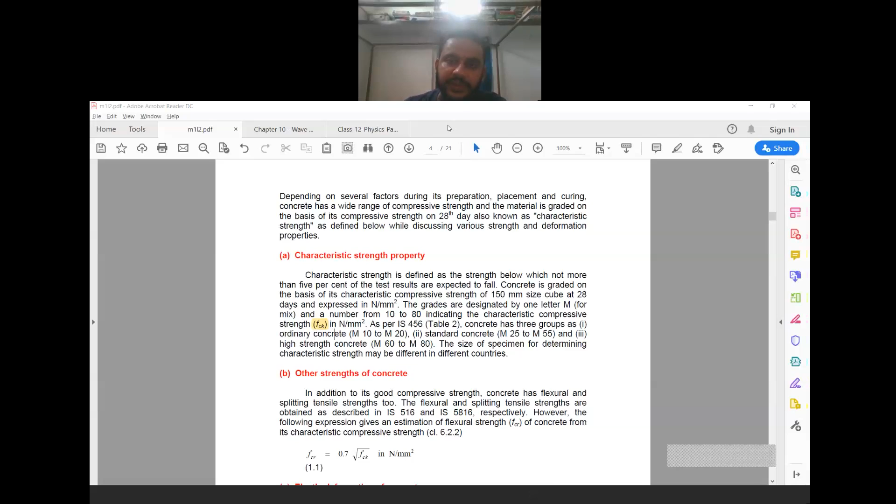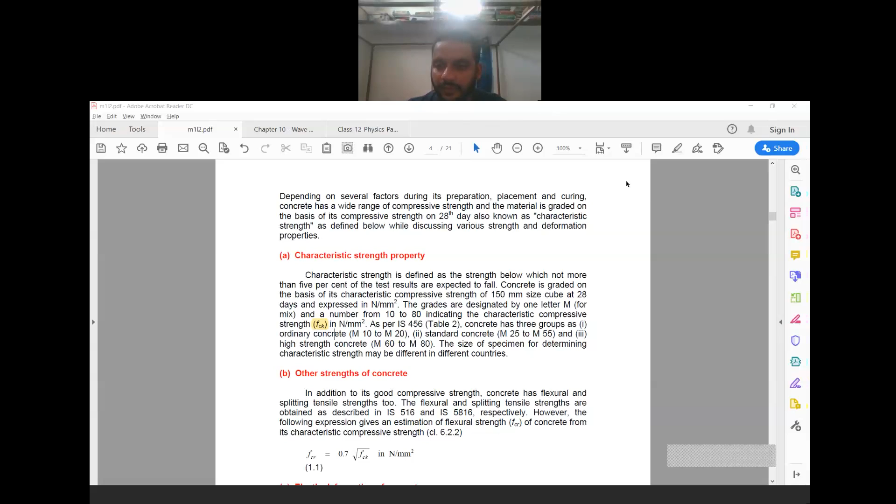Okay, so next, see this other strength of concrete. Now do you have IS 456 2000 with you, all of you? Do you have IS 456 with you? In the last class I told you so many times.

Yes sir. Okay, so now go to clause number 6.2.2, the clause number written in the PDF. Go to clause number 6.2.2. So if you go to that clause, you can see there is a formula given.

Tensile strength of concrete, can you see it in the book, in the PDF? Can you see the formula? I think it will be on page number 16. FCR means it is the tensile strength of concrete. So tensile strength of concrete equals 0.7 into square root of FCK, Newton per millimeter square. With this formula we can find out the tensile strength of concrete.

So now, say in the exam you have a question that for M20 grade of concrete, what will be the value of tensile strength? Can you find out the value, all of you? Can you find out the value? Try to find out and tell me the answer.

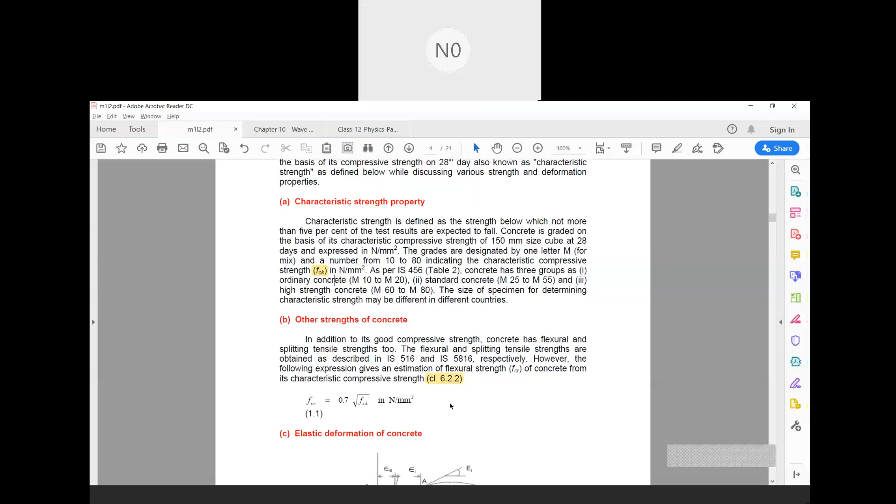3.13, 3.13. What will be the unit? Newton per millimeter square. Newton per meter square or millimeter? Millimeter square, yes, Newton per millimeter square, not meter square. Newton per meter square will be your Pascal. If you write Newton per meter square, then it will indicate Pascal, and in that case it will be wrong.

So how did you find out the answer? Can you tell me how did you find out the answer?

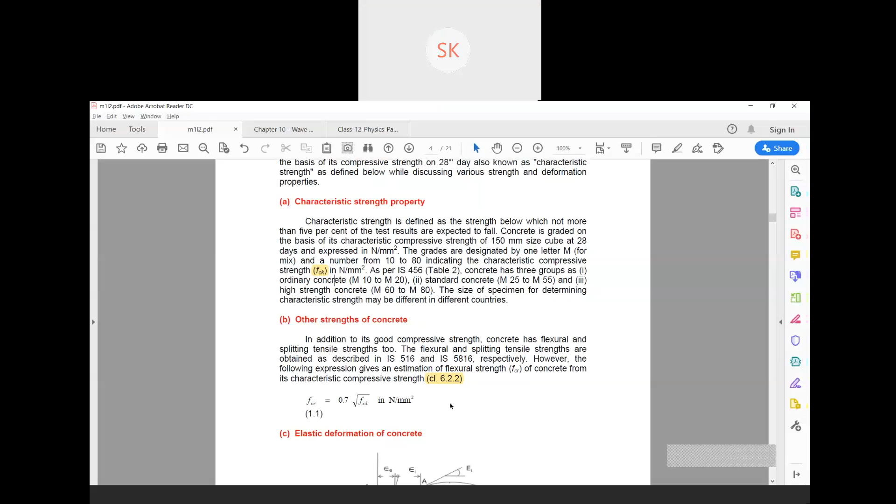Since it is M20, the compressive strength will be 20, so the FCK value will be taken as 20. Just put the value of FCK as 20, and you will get the answer.

Similarly, for M30 grade of concrete, you just have to put the value of FCK as 30, then you will get the answer. So from the characteristic compressive strength, you can find out the tensile strength of concrete also. Let us see the other one.

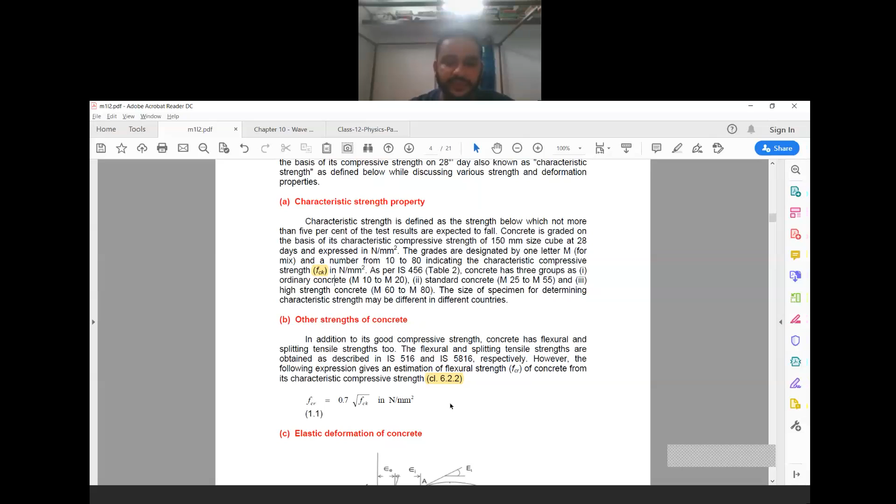Next, elastic deformation of concrete. Go to the formula: EC equal to... I hope you can see the formula. EC equal to 1.2, 5000 square root of FCK.

EC means modulus of elasticity of concrete. The suffix C indicates C for concrete and E for Young's modulus or modulus of elasticity. Similarly, we can find out the modulus of elasticity for concrete from the value of characteristic compressive strength.

You can see the chat box, I will write down the clause number: clause 6.2.3.1, in the same page, page number 16. Go to clause number 6.2.3.1.

The modulus of elasticity of concrete can be written as given by the formula in the IS code also. I hope all of you can see it. Can you see the formula in that IS code? Yes sir. So from this formula also you can find out the elastic modulus of elasticity for concrete.

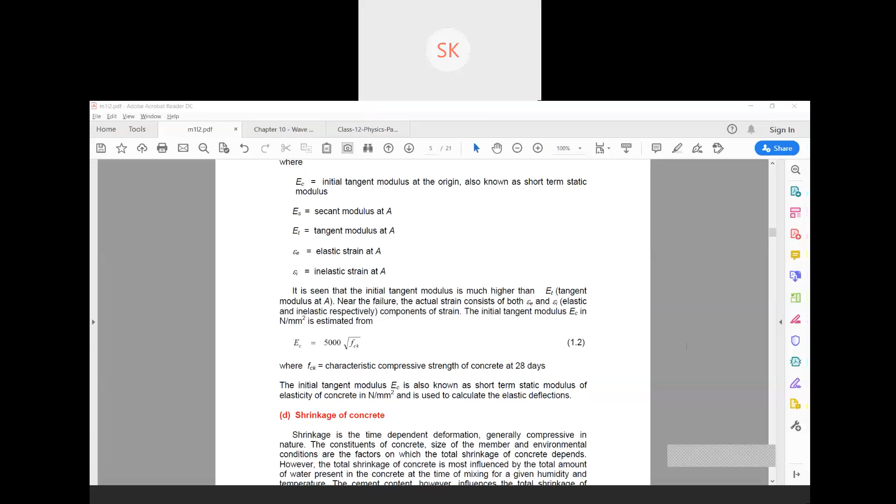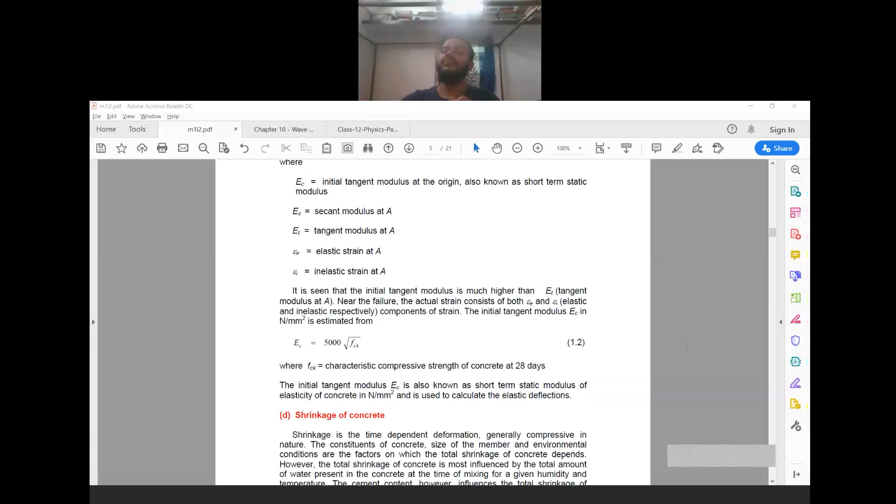Did you get the answer? For M30 grade of concrete, what will be the value of modulus of elasticity? 27386.1. What will be the unit? No unit? No, Newton per millimeter square. If you don't write anything, then it will be wrong. The unit of E will be the same unit as FCK, Newton per millimeter square.

After getting these values, let us go to the next property of concrete, known as shrinkage of concrete. Shrinkage means it is the loss of moisture content from the concrete, loss of moisture content by evaporation.

If you lose moisture from the concrete by evaporation, then what might happen? The water present during casting might be lost due to evaporation, and as a result some voids will be generated within the concrete, and because of those voids, some cracks might develop on the surface of the concrete. So we have to avoid that loss of moisture content from concrete.

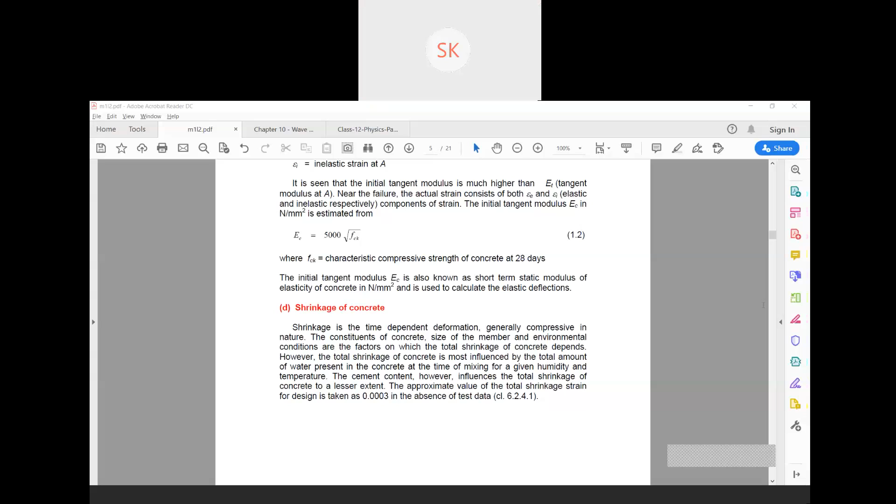Yes. In order to avoid the loss of moisture. If you don't put water on that slab, then what will happen? Because of the sun, we might lose the water which is present in the concrete, and as a result, voids will be generated within the concrete, and because of those voids, cracks might develop on the surface.

Okay, so... Sir, my friends are texting me. They said, will you please allow them to enter the room? They lost connection, so they had to get out. Okay, wait, wait. Okay, sir. Okay, I will let them. Tell them to connect again. Yeah, three participants are waiting.

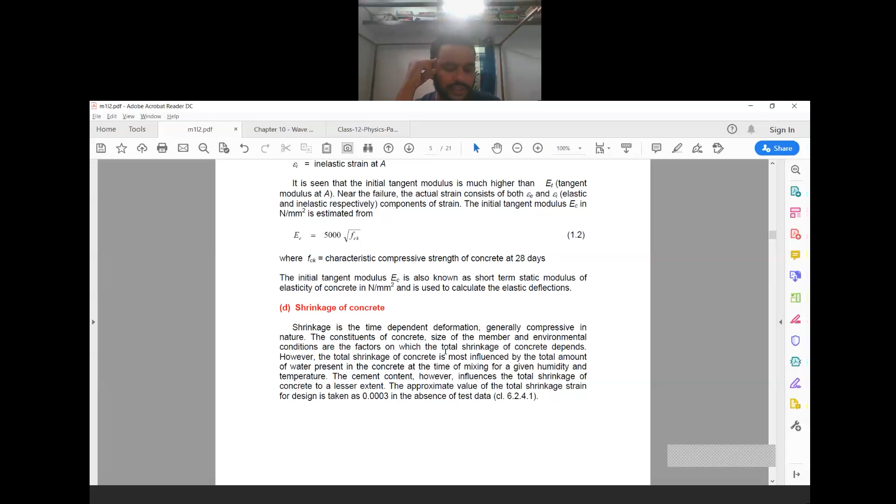Then you can write down another one. Shrinkage also causes strain in concrete. Next, you write down one line. The shrinkage strain mainly depends upon the amount of water present at the time of casting.

Okay. And is it casting? Yeah, at the casting. Casting. The shrinkage mainly depends upon the amount of water present at the time of casting.

Okay, so now you go to the IS code. Go to clause number 6.2.4, same page, page number 16. Can you see that heading, shrinkage? Yes. Okay, so in clause number 6.2.4.1, in the same page, you can see: in the absence of test data, the approximate value of total shrinkage strain for design may be taken as 0.0003. Can you see the value in the IS code?

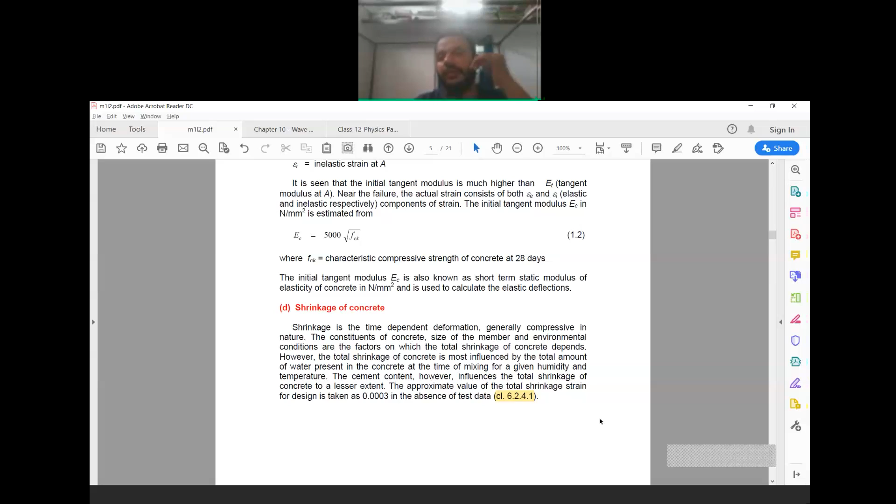You can highlight it in the PDF. Just select the value, right click with your mouse, then you can see highlight text. Click that, and that portion will be highlighted in the PDF. I hope all of you can do it. Highlight the important portions; I will tell you in the respective classes. Whenever I give you some clause or values, highlight that in the PDF, because we are going to use them, and in the exam you might find questions from those clauses.

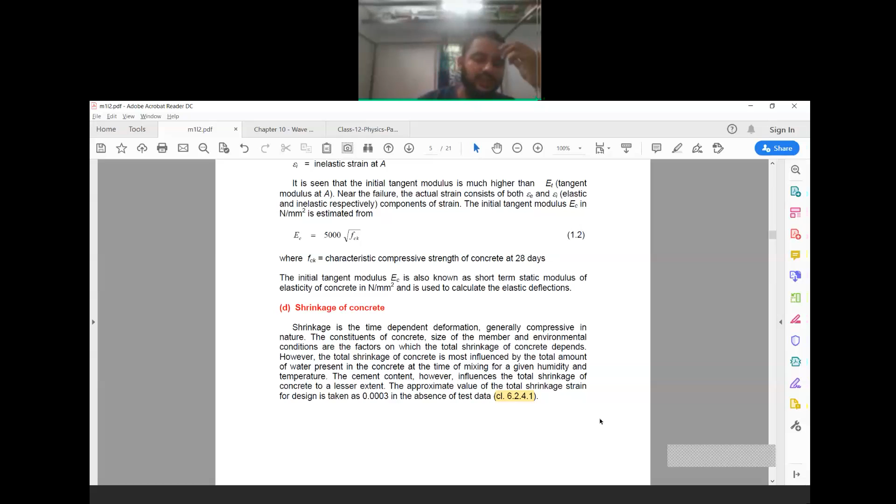Okay, so let us see the next point, creep of concrete. Again you can see in the IS code just below shrinkage, clause number 6.2.5, in the same page, creep of concrete is written. I hope all of you can see that part. Can you see creep of concrete in the IS code, clause number 6.2.5, just below shrinkage? Yes, sir. I hope you can see it.

Hello, can you see? Yes, sir, we can see. Okay, so if you want, you can write down 2 lines about creep. Do you want to write? Hello? Yes, sir. Do you want to write 2-3 lines about creep? Yes, sir. Okay, then write it down.

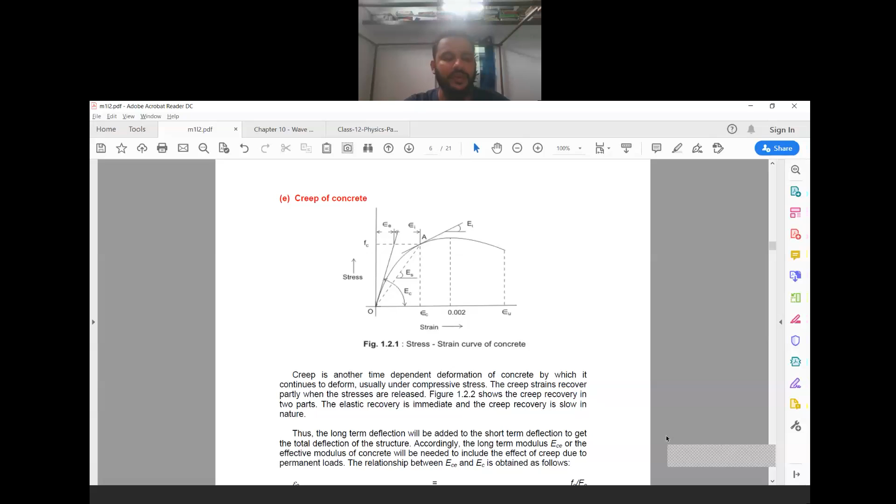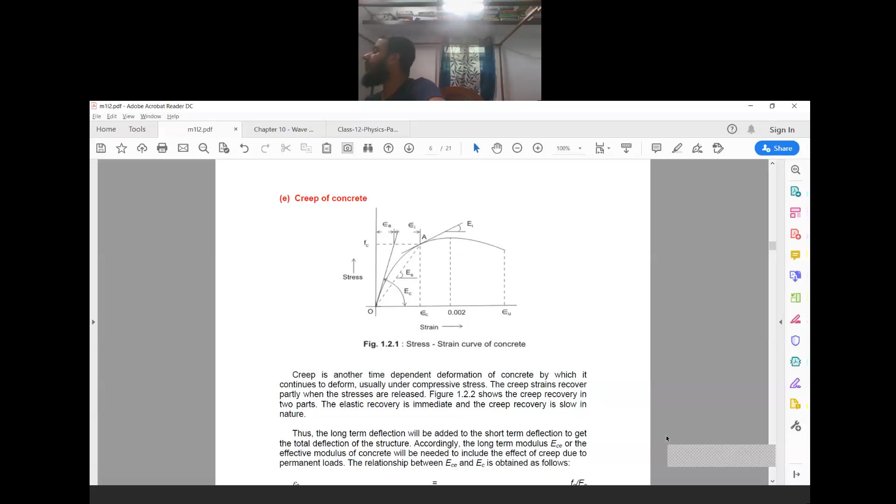Write down, creep is caused under sustained loading. Write down, creep is caused under sustained loading. Yes, sir. Next, write down, it is seen that when concrete is subjected to sustained loading, it is seen that when concrete is subjected to sustained loading, comma, strain keeps increasing with time. Strain keeps increasing with time.

So can you repeat once again, sir? Okay, first line is creep is caused under sustained loading. Next, it is seen that when concrete is subjected to sustained loading, strain keeps increasing with time, even without any increase in the load. Even without any increase in the load. Sir, without any increase in the? In the load. Without any increase in the load.

Next, write down. This strain, which is caused due to sustained stress, this strain, which is caused due to sustained stress, and which is time dependent, is known as creep. This strain, which is caused due to sustained stress and which is time dependent, is known as creep.

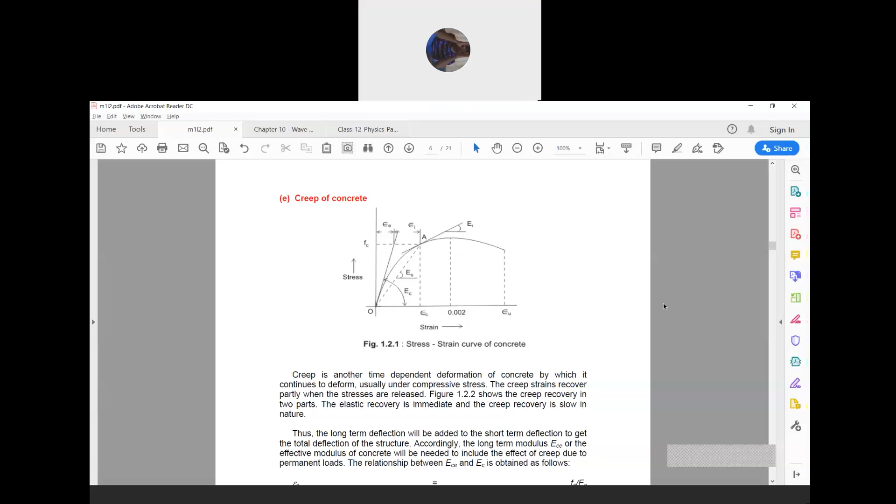Okay, so I hope all of you can write it. It depends upon the following factors. Number one was stress level, number two, age of loading, and number three, duration of loading. I hope all of you have written it. Okay.

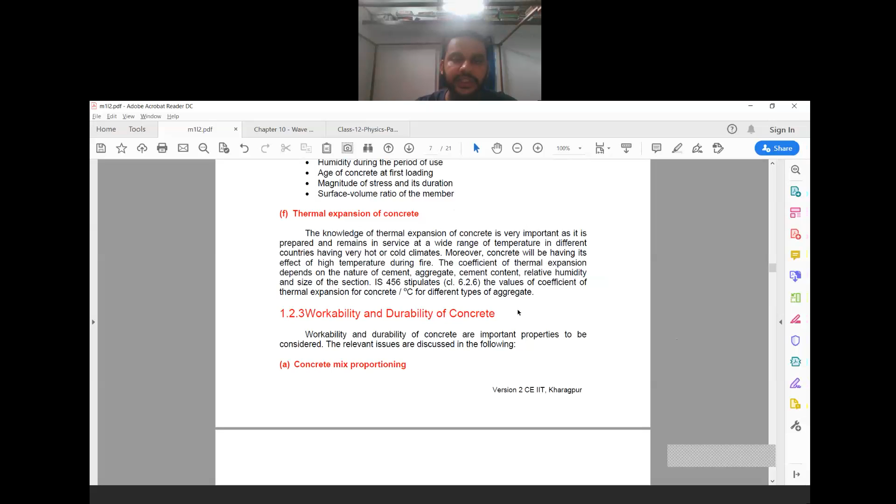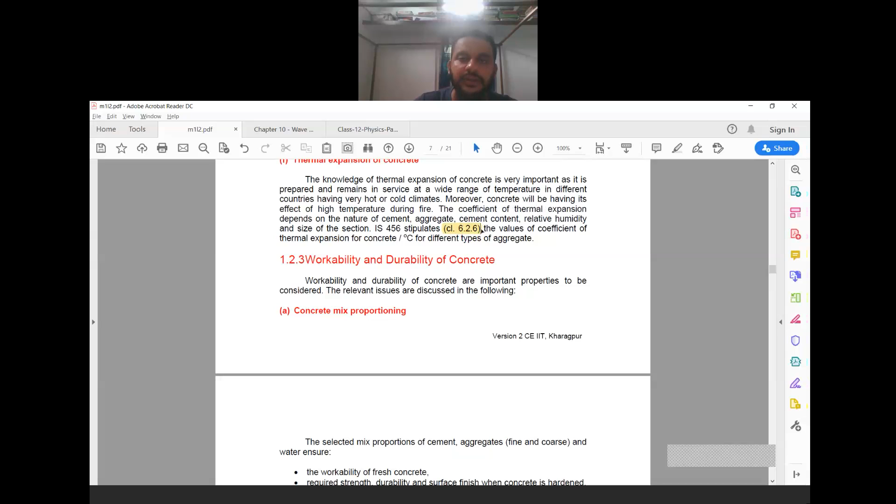So next, let us see the thermal expansion of concrete. In the last class, I think I told you why steel is used in concrete. So now you can see the thermal expansion of concrete in the PDF. Whatever clause number is mentioned in the PDF, you can write the clause number and go to IS 456. If you go to clause number 6.2.6, you will see the thermal expansion of concrete.

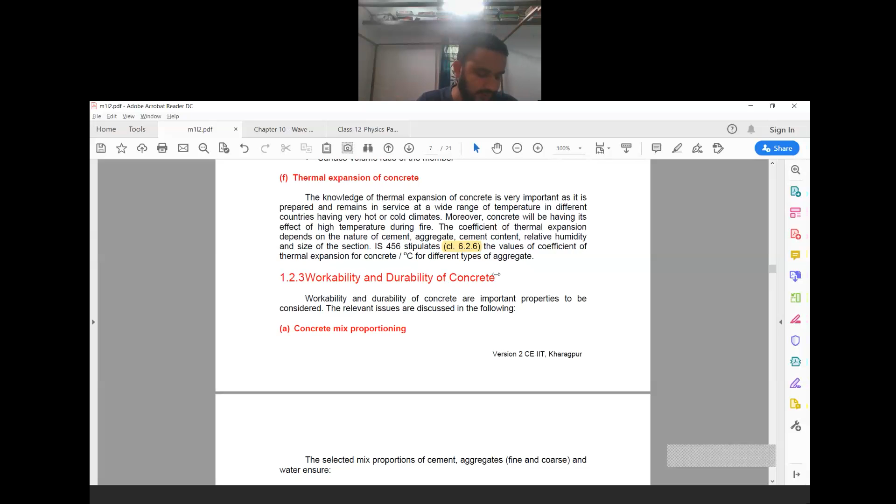Next is a very important property which is known as workability. Workability is the property which determines the ease and homogeneity with which concrete can be mixed, placed, compacted, and finished. If your concrete is workable, then only we can use that concrete for any construction. A workable concrete will not have any segregation or bleeding.

So now can anyone tell me what is the meaning of the word segregation or segregate? I think, sir, segregation is like a small partition. Segregation is nothing but separation. So how can you understand segregation?

Say I have given you some coins of 1 rupee, 2 rupees, 5 rupees, and 10 rupees, put all in one container, and told you to segregate the coins. You will take out the 1 rupee coins separately, the 2 rupee coins separately, the 5 rupee coins separately, and keep the 10 rupee coins separately. Then you can say that you have segregated all the coins.

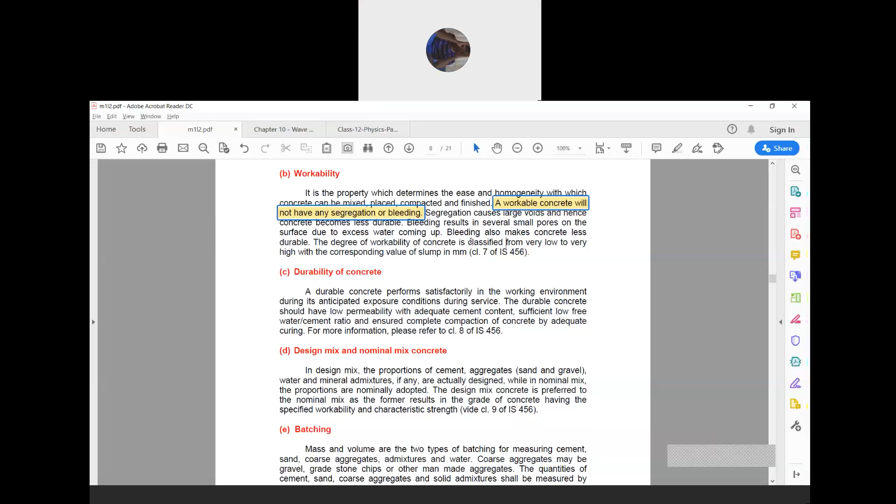Bleeding means, just take the example: if you cut your hand, blood will come out. Similarly in concrete, if you put excess amount of water, then after mixing, what will happen? It will overflow. Yeah, the water will take cement and sand with it and flow out. Yes, sir.

If you put extra amount of water, that extra water will take cement and sand with it and flow out of the concrete. So if you use that concrete in your